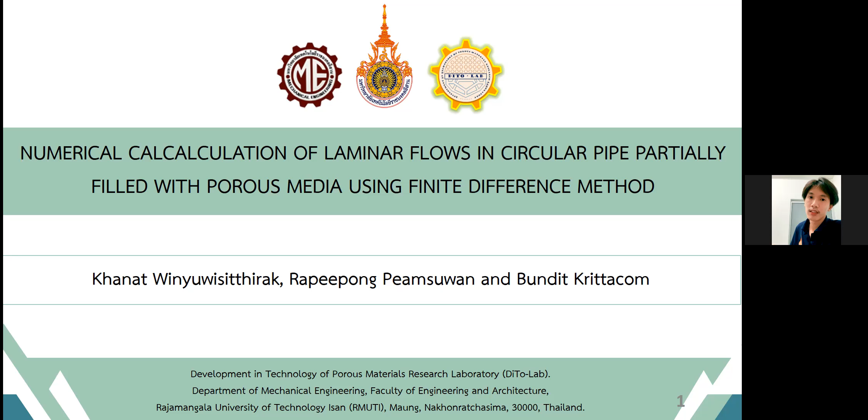Good afternoon, ladies and gentlemen. My name is Khanat Winyuwisitthirak. First of all, thank you all for coming here today. Today I'd like to present about numerical calculation of laminar flow in circular pipe partially filled with porous media using the finite difference method. This is the research of Khanat Winyuwisitthirak, Rapeepong Peamsuwan, and Bundit Krittacom.

My presentation will be in 5 parts. In the first part, introduction, the flow of fluids can be divided into 2 types. The Couette flow is the movement of the top plate, while the plate below it will not move. The Poiseuille flow is a flow in which the 2 flat plates remain stationary.

Filter, heat exchanger, catalytic converter, and pneumatic devices are examples of Poiseuille flow through porous media in industrial applications.

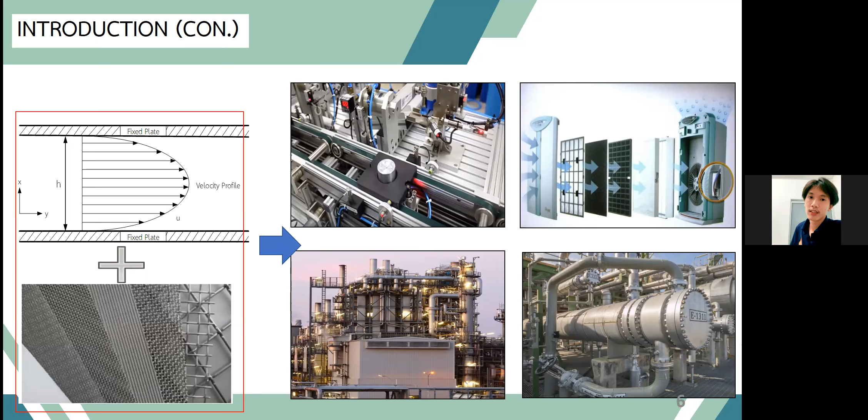Adetayo Samuel Eegunjobi studied inherent irreversibility in unsteady generalized Couette flow between parallel plates with variable viscosity, using the finite difference method.

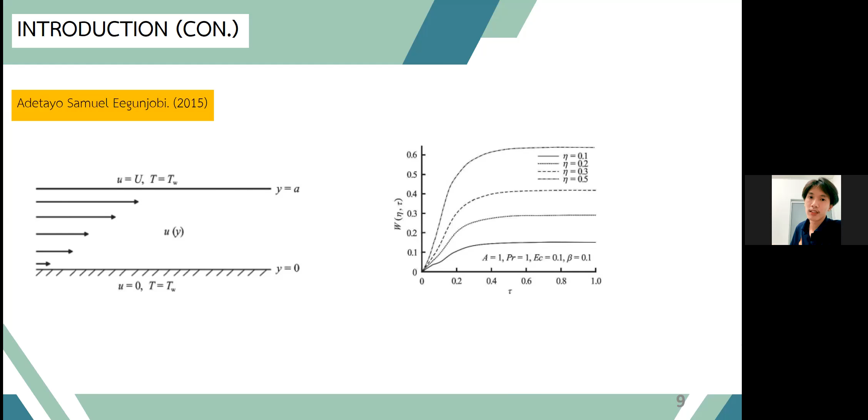Iffat Zehra et al. studied pressure-dependent viscosity subject to Poiseuille and Couette flow via a tangent hyperbolic model, using the finite difference method.

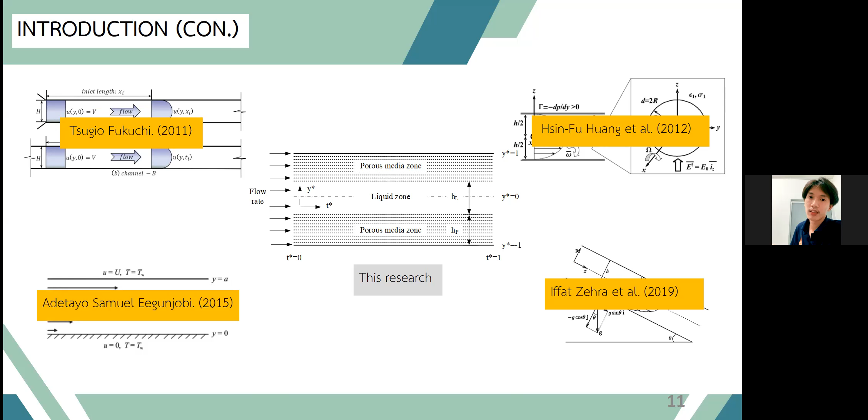As a result, we present a numerical simulation of laminar flow in a circular pipe partially filled with porous material using the finite difference method. We examine the velocity and temperature profile inside the pipe and within the pipe wall. Let's go to the next point.

Mathematical model. The physical model of fluid via porous media and porous media dependency is shown schematically in the figure.

Equations 1 and 2 are the governing equations for the Navier and energy equation in the fluid zone. Equations 3 and 4 are the governing equations for the Navier and energy equation in the porous media zone. The boundary conditions in the fluid zone are equations 5a and 5b. Equations 6a and 6b define the boundary conditions in the porous media zone.

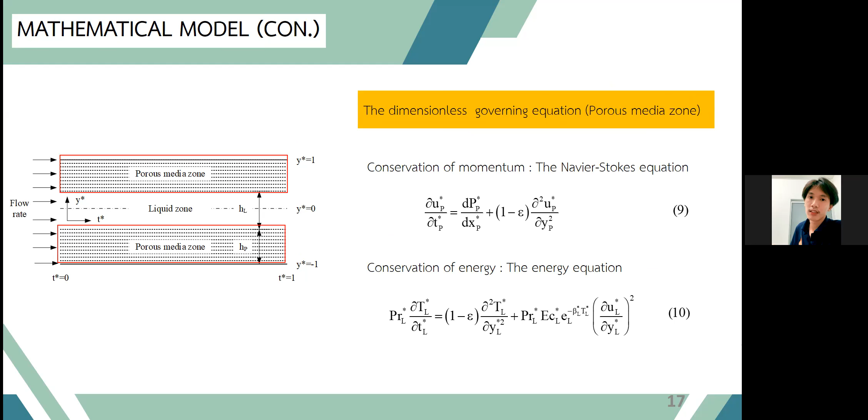All of these are dimensionless equations, which are defined in the mathematical model. Equations 7 and 8 are the dimensionless governing equations for the Navier and energy equation in the fluid zone. The dimensionless governing equations for the Navier and energy equation in the porous media zone are equations 9 and 10. The dimensionless boundary conditions in the fluid and porous media zones are equations 11a, 11b, 12a, and 12b.

Let's go to the next point. Finite difference method. The dimensionless governing equations were substituted with finite difference approximations, following the Navier-Stokes and energy equations. We use the explicit finite difference method to solve the problem.

This is the finite difference form of the Navier-Stokes equation, equation 13, and the energy equation, equation 14, in the fluid zone. Let us define the time interval of the finite difference for the Navier-Stokes and energy equations for the fluid zone as equations 15 and 16.

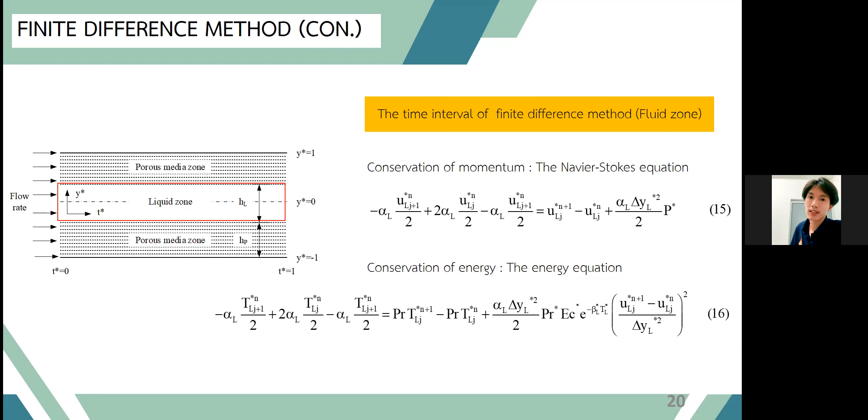This is the finite difference form of the Navier-Stokes equation, equation 17, and the energy equation, equation 18, for the porous media zone. Let us define the time interval of the Navier-Stokes and energy equations for the porous media zone as equations 19 and 20.

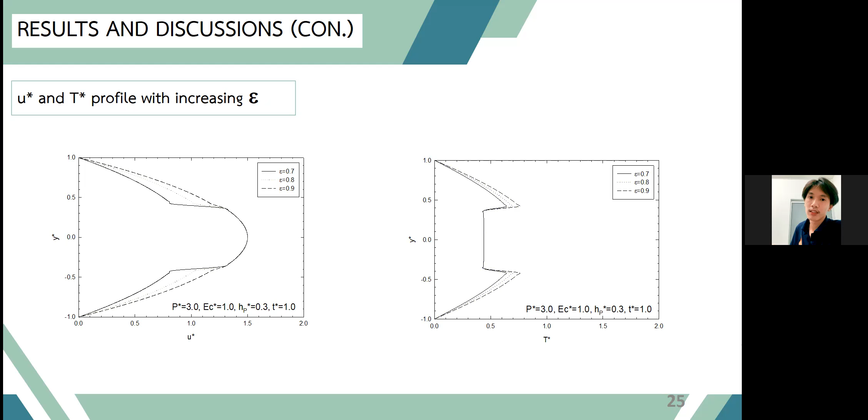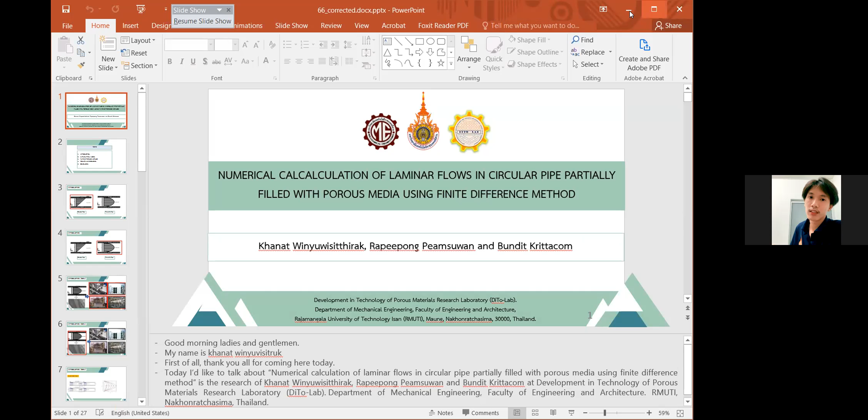By this time, Dr. Bevin. Yep, hello Dr. Bevin. Yes. In my place the network also sometimes has problems, so if something happens, please continue for the next presenter after finishing the previous one. No worries, I need your help. No worries, okay, thank you.

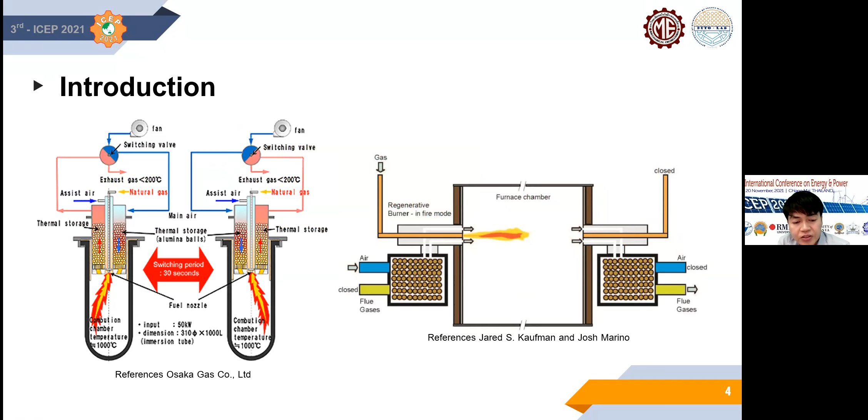The advantages of combustion in a porous material are stability of the flame, high radiation output, and reduction of NOx and CO. The porous burner is readily applied for many purposes, including heating such as heat exchangers, power generation, gas stoves, and power sources.

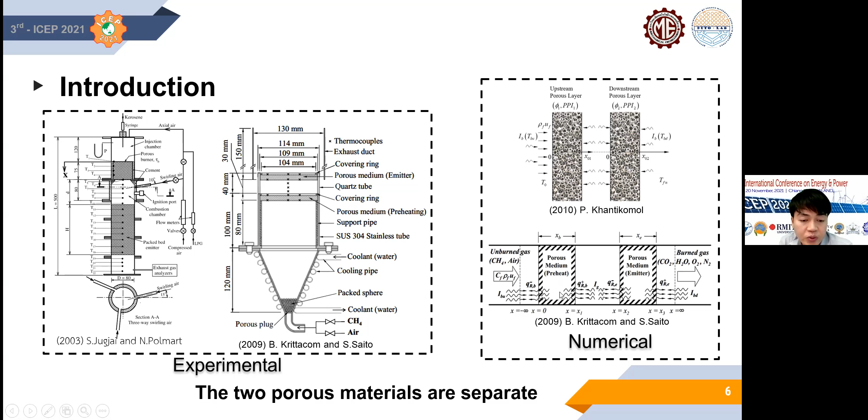The two porous materials used to separate the higher thermal radiance output are the porous absorber (PA) and the porous emitter (PE), which are major criteria that have encouraged many engineers and researchers to conduct numerical and experimental studies.

In the year 2018, we conducted an experimental study on the installation of a two-bank heat exchanger on a gas porous burner, to study the performance of the combustion mechanism and thermal efficiency.

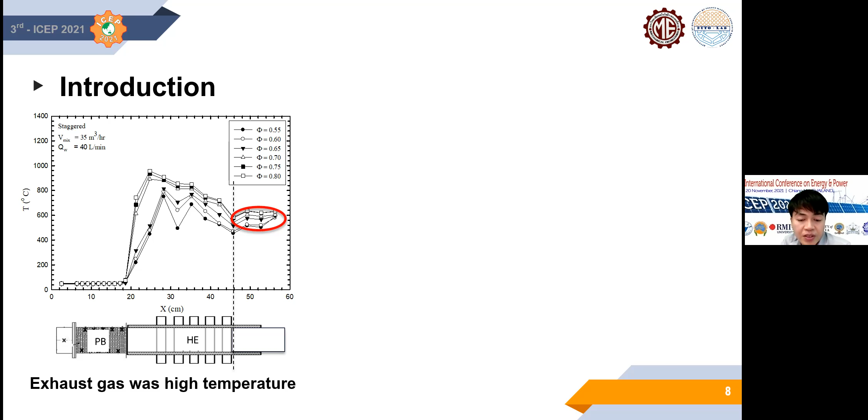The PE is installed at the exit zone of the porous burner. It was found that T increases, improving the combustion performance.

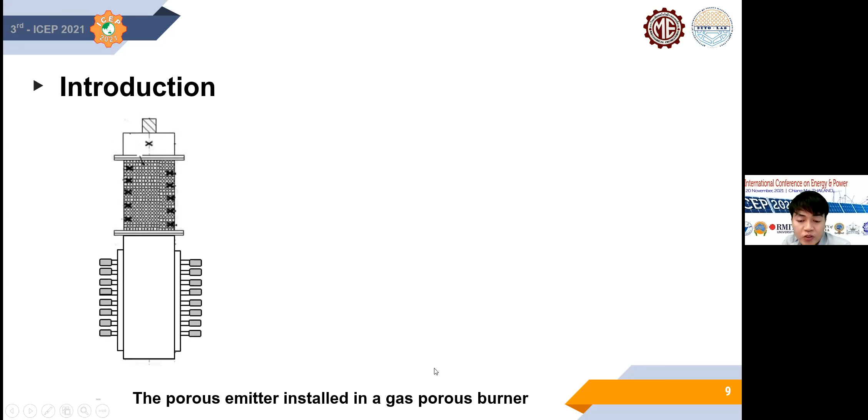From the experience with the PE of the gas porous burner, the PE was extended as the exit zone of exhaust gas below the two-bank heat exchanger, with the objective of improving the thermal effectiveness of the two-bank heat exchanger and the thermal efficiency of the gas porous burner.

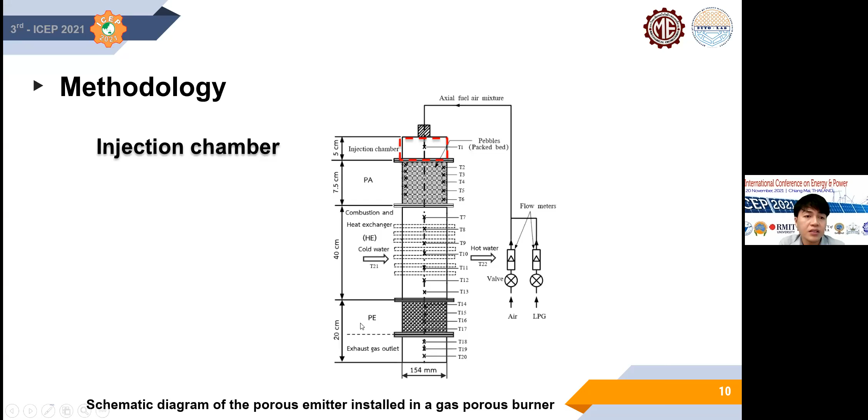Hello, Sri Punya. Probably his network is not working. His connection seems to have dropped, he is disconnected. Okay, just wait a few minutes, one minute, let's see. Okay, no problem.

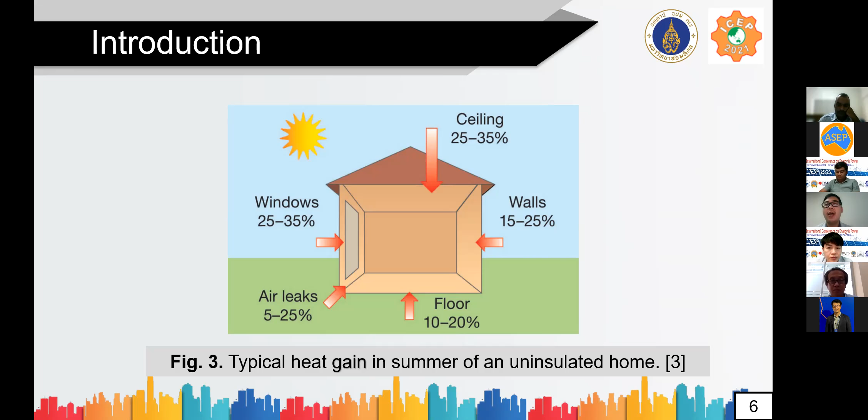Next, methodology. First, preparation of samples. Roof paint samples of various colors were obtained from two well-known commercial brands in Thailand, Brand A and Brand B. It comprises 3 colors: white, black, and red.

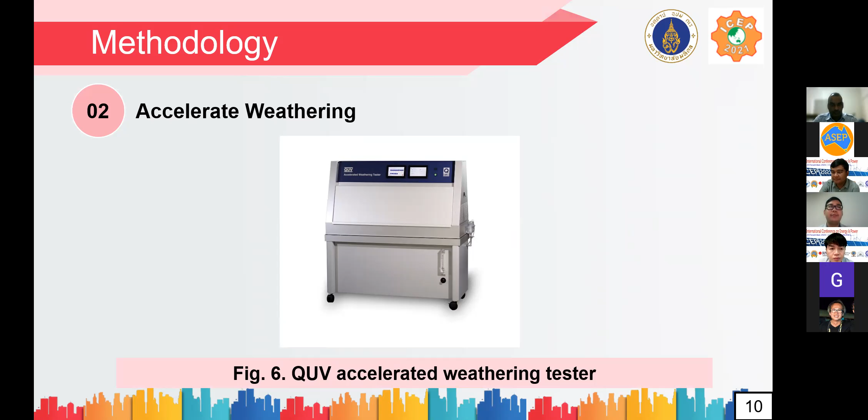Next is the UV measurement. A UV-NIR spectrophotometer was used to measure solar reflectance with wavelength ranging from 300 to 2500 nanometers, and thermal emission was measured by Fourier transform infrared spectroscopy (FTIR). These values were used to calculate the solar reflectance index (SRI), and finally to calculate roof thermal transfer value following the equation.

This is indicative of lesser heat absorption. Considering the black and red color shades for both brands, they can only reflect heat within the infrared spectrum, with a lower percentage than white color.

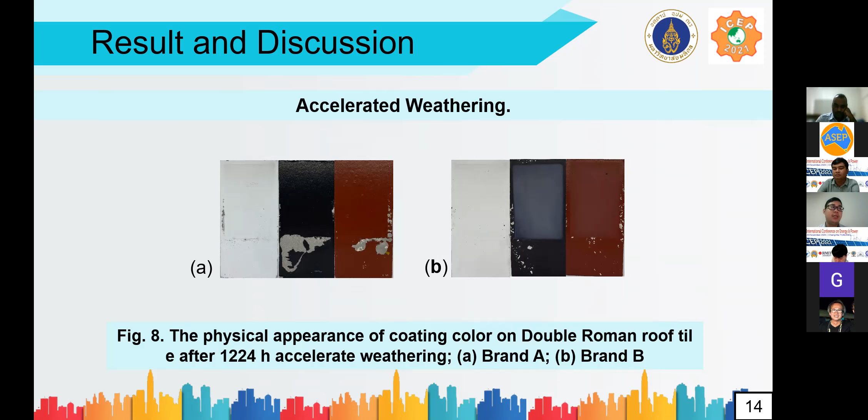The red color showed SRI differences of no more than 0.85% and 3.57% for Brand A and Brand B respectively. So the red color was not significantly different.

Next, we calculated the roof thermal transfer value. The heat that passes inside the building is studied by determining the roof thermal transfer value, or RTTV. The results in figure 10 show the relationship between roof thermal transfer value and equivalent natural aging. For the white color coating roof in figure 10A, we found an increase of roof thermal transfer value.

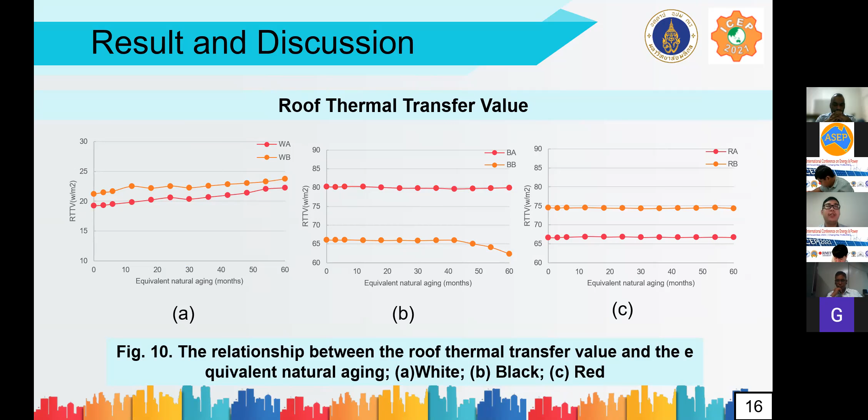Finally, conclusion. This study on accelerated weathering experiment used 3 colors consisting of white, black, and red, and brands A and B. White color coating had higher solar reflectance in visible and infrared wavelengths, giving the highest reflectance at initial time. After accelerated weathering by QUV accelerated weathering tester, the reflectance index was reduced. On the other hand, black and red coatings had lower solar reflectance index due to their lower reflectivity.

In summary, white coating roof was shown to have more energy saving potential in the building. This is my references.

Thank you. Do you have any question?

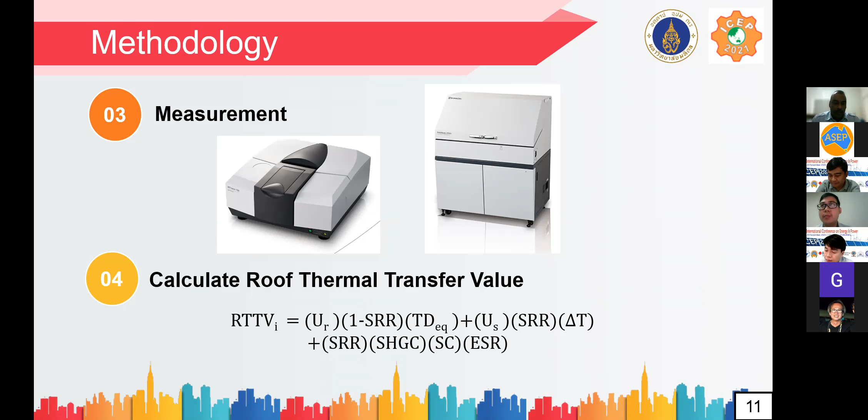I think a professor was asking you, what was your efficiency? When you spoke about efficiency, what did you compare your results to? When you say, for example, I can increase by 30%, or reduce the energy loading by 30%, do you have any figure?

How much energy can you save by using this cool roof paint? So, for example, you say I can save 30%. How did you say that? How did you compare, and with what?

It's not linearly comparing. Yes, if SRI increases, roof thermal transfer value decreases, but not linearly. It cannot be compared directly; there is no equation to calculate and compare that.

Fantastic. And why did you just choose these three colors? Because I think I saw a silver color. You showed a silver color?

Yes, yes. So why did you only choose red, black, and white? So white and black are reference colors, and red is most used in Thailand. Okay, yes.

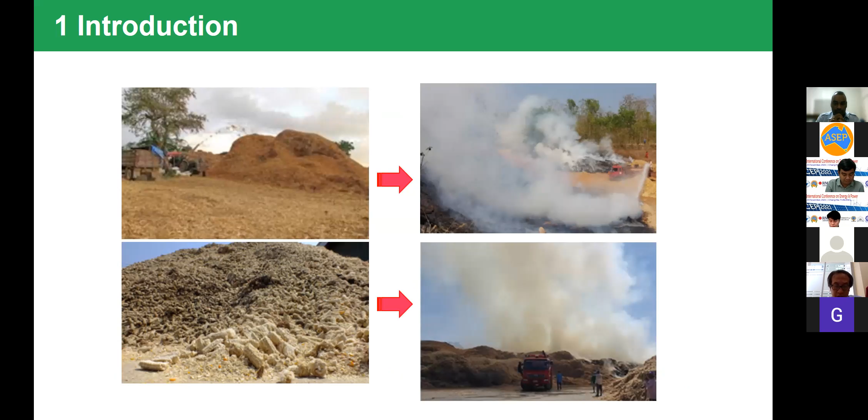In the past, farmers in Thailand burned this residue to destroy it, leading to pollution from smoke, dust, and air pollution. However, corn crop residue after pyrolysis or carbonization can be converted to biochar. It can be used to produce biogas or pellet fuel. Corn crop biochar can also be used in organic cultivation and to reduce soil acidity.

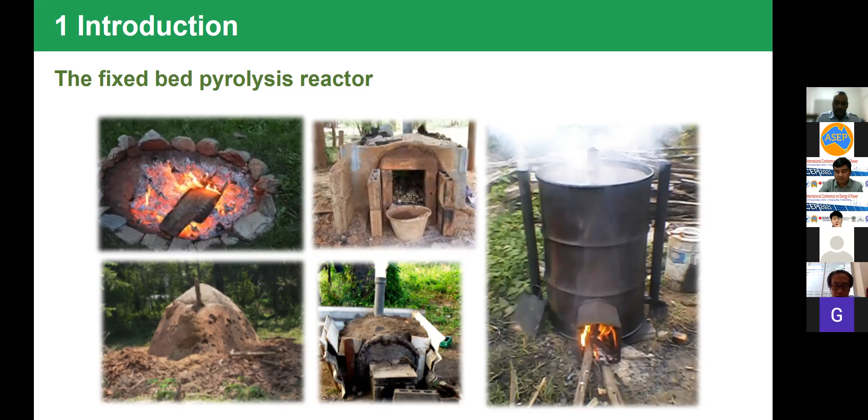Normally, biochar is produced using a fixed bed pyrolysis reactor, such as pit kiln, small kiln, big kiln, and transportable metal kiln. Usually it takes a long time to produce, with high cost. Therefore, there is an idea to create a moving bed pyrolysis reactor, which with a shorter residence time can reduce the energy input and increase the production rate.

As the design concept, the moving bed pyrolysis used a 1 horsepower electric motor to actuate the biomass.

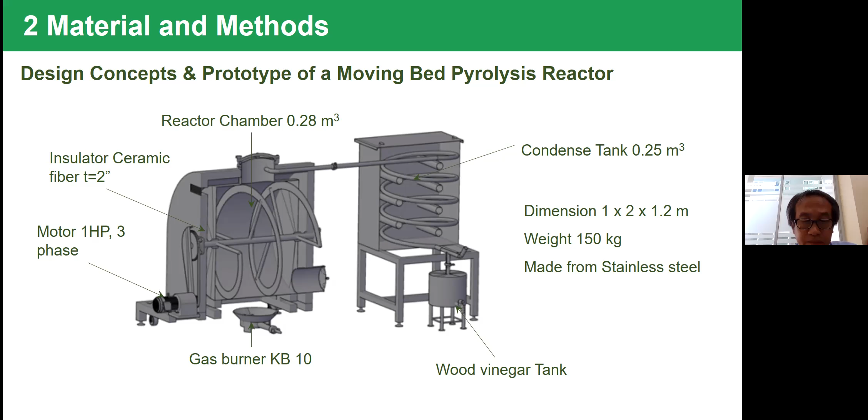Its pyrolysis chamber, 280 liters, made from stainless steel, could handle 30 kilograms of corn cobs. The heat source comes from the combustion of cooking gas. Temperature is in the range of 450 to 550 degrees Celsius. The cooling pipe is coiled into a spring made from stainless steel pipe.

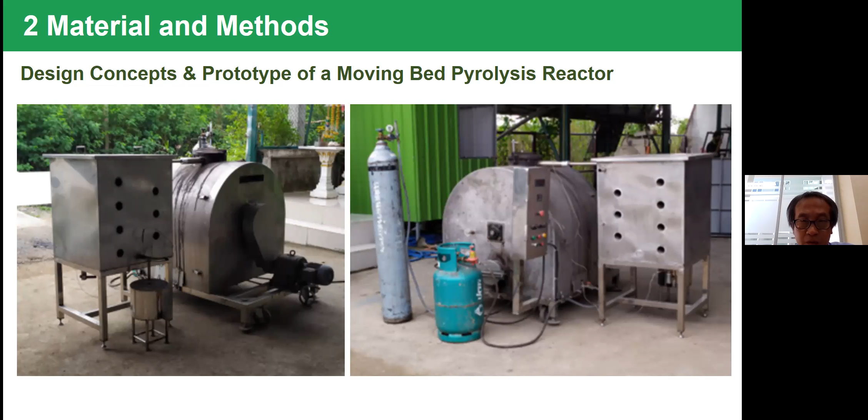The moving bed pyrolysis reactor prototype dimension is approximately 1 meter wide, 2 meters long, and 1.2 meters high.

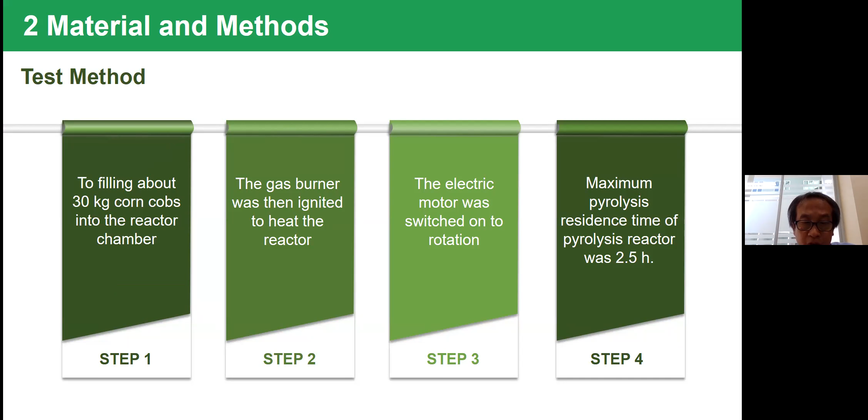Test method: first, fill about 30 kg of corncob into the reactor chamber. Second, the gas burner was ignited to heat the reactor. Third, the electric motor was switched on for rotation. Fourth, the maximum pyrolysis residence time of the pyrolysis reactor was 2.5 hours.

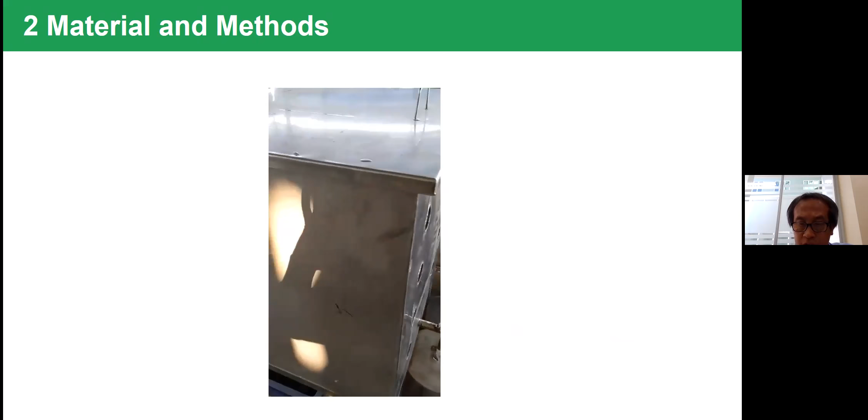The valve of the chamber was opened to release moisture and volatile matter for about 30 to 60 minutes. Once temperature reached 300 degrees Celsius, some corncob was converted to biochar. The temperature continued to rise.

Up to 560 degrees. The weight of biochar, cooking gas, charcoal, and wood vinegar before and after the experiment were monitored, while the pyrolysis temperature and residence time were recorded throughout the process.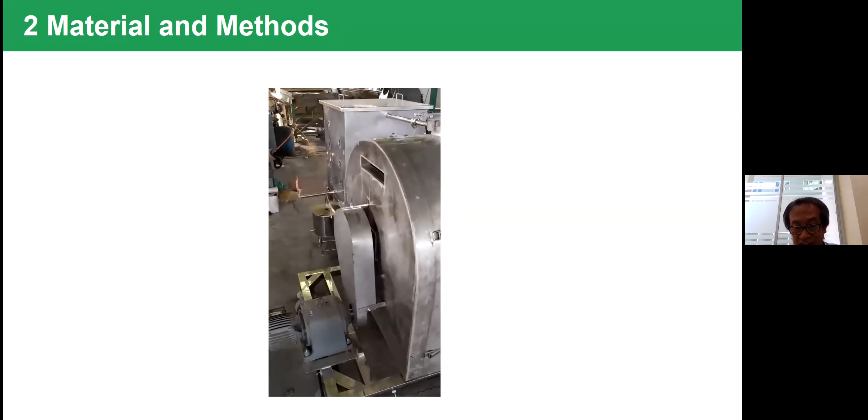The test of the moving bed pyrolysis reactor, carrying 30 kg of corncob, showed satisfactory results, generating pyrolysis temperature up to 600 degrees Celsius. The electric motor worked well. The process of corncob was carried out in 2.5 hours, yielding about 9.5 kg of biochar.

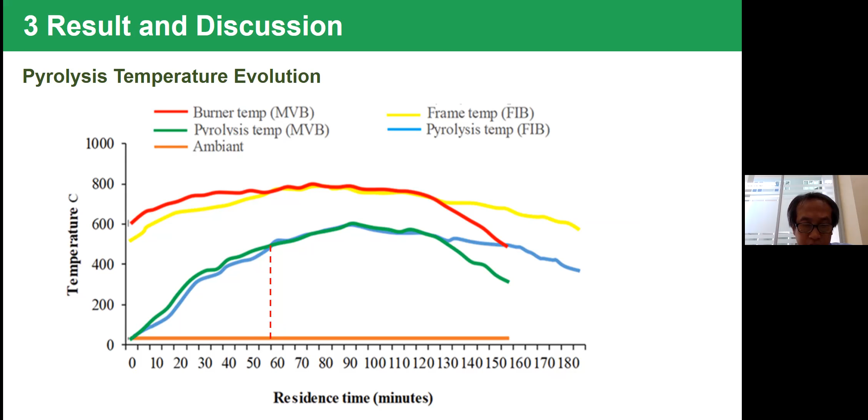The temperature was compared to a fixed bed pyrolysis reactor from observation. At the start of the process, the moving bed pyrolysis reactor could produce higher pyrolysis temperature than the fixed bed pyrolysis reactor. However, after 60 minutes, the pyrolysis temperatures were similar.

From the test, carbonization was found to work well, providing high yield of biochar in 2.5 hours, and achieving pyrolysis temperature up to 600 degrees Celsius.

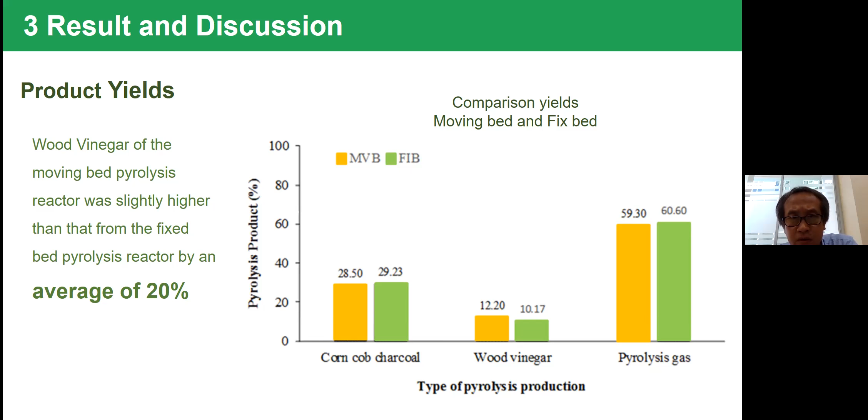The pyrolysis gas, the product, from your slide you have a pyrolysis gas. So you use it for heating.

Again, please. Oh, I'm looking at your chart here. So you have your products: corn cob, charcoal, wood vinegar, and your pyrolysis gas. So the yellow one is moving bed and the green one is fixed bed. Okay, so it's similar, only the wood vinegar is higher.

No worries, thank you. Thank you for your presentation. Any other questions? Thank you. Professor, any questions?

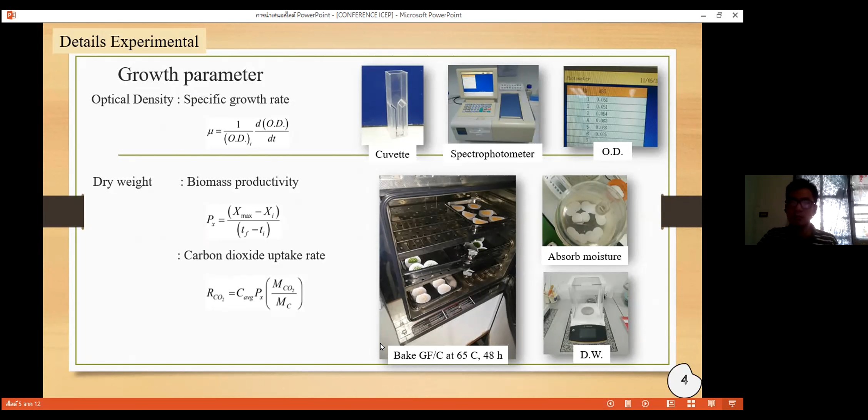This novel-built tubular coil photobioreactor was designed for lab scale and consists of a tubular coil and a vertical bubble column. The tubular coil reactor has an extensive length that increases the residence time between carbon dioxide and algae, so that more carbon dioxide can be dissolved.

Moreover, the tubular reactor has a small diameter, so the algae is thoroughly subject to illumination. The bubble column is assembled to the tubular coil reactor to increase the gas transfer rate.

The microalgae culture is pumped from a buffer tank to the top of the tubular coil by a magnetic pump, where it flows by gravity to the coil bottom, then returns to the surface of the buffer tank for the dissolved gas from photosynthesis production, passing through a cooling jacket and magnetic pump respectively. The tubular photobioreactor is made up of 4 subsystems: the light supply, the buffer tank, the liquid circulation, and the temperature control.

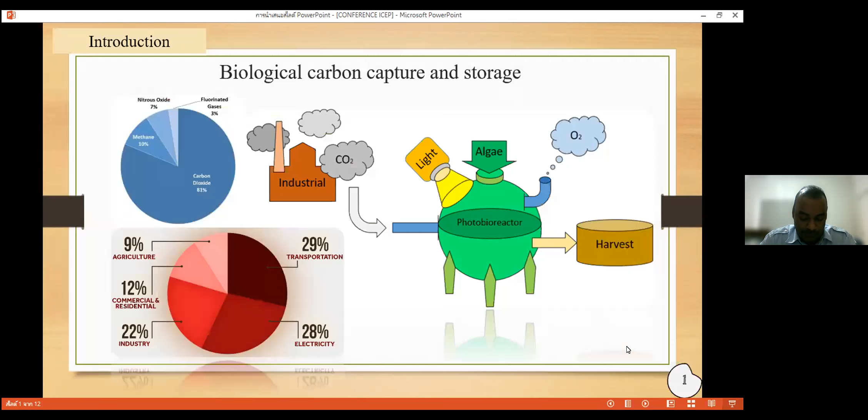So I have one question here. You chose this specific strain. Why did you choose Coelastrella? Did you consider any different algae strains, or why did you choose this strain? Coelastrella? Okay, Coelastrella. Coelastrella sp., sorry.

It is categorized as a thermophilic species that can withstand high temperatures. In this model, there is heat from the pump, and Coelastrella can withstand high temperature.

Okay, so high temperature. What is the average temperature in Thailand? I'm setting up the photobioreactor in an indoor lab scale. Ambient temperature is about 30 to 32 Celsius.

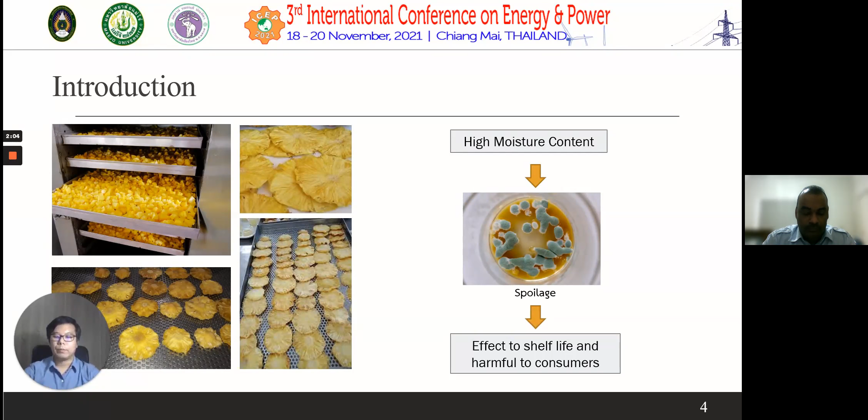Ultrasonic vibration technology can be used to induce water movement in the product, resulting in a faster dehydration rate. The advantages of ultrasonic are low power consumption and low heat build-up at the vibration transducer. In addition, using low temperature can preserve nutrients in the product. It is of great interest to apply this technique to the pineapple drying process.

From the problems above, the objective of this research is to reduce the drying time by using ultrasonic vibration technology.

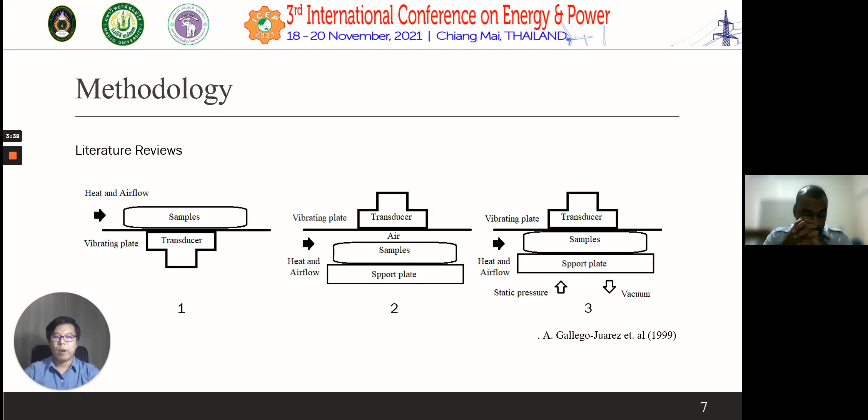Methodology: from literature review, ultrasonic setting in drying is shown in 3 methods. The first feature is suitable for setting up ultrasonic vibration in a hot air dryer. Features 2 and 3 are suitable for a vacuum dryer or microwave dryer. For my experiment, a laboratory hot air dryer was used to simulate the conditions of a solar dryer for pineapple processing.

Fresh pineapples were selected according to their maturity and color. After cleaning and peeling, they were sliced into pieces about 10 mm thick using a slicing machine. A transducer with a frequency of 40 kHz and 50 watts was set up and installed at the center of a wire mesh sized 40 by 40 centimeters. Operating temperature was fixed at 60 degrees Celsius, based on the temperature in the solar dryer.

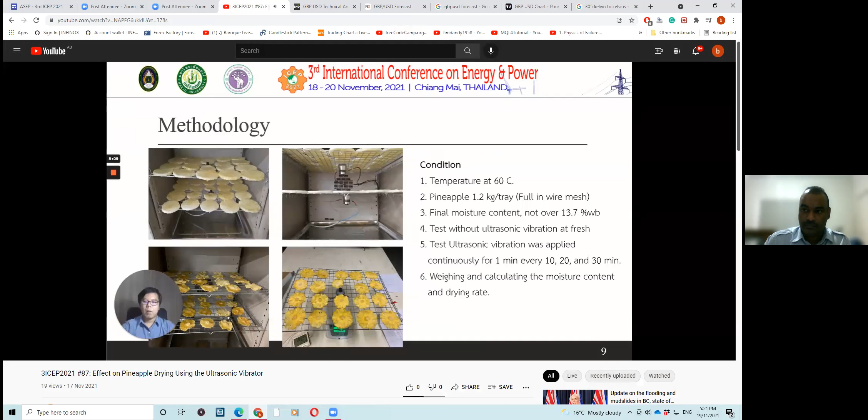The condition of the experiment: temperature fixed at 60 degrees Celsius, volume of pineapple about 1.2 kg per tray, final moisture content not over 13.7% wet basis. Tests were done without ultrasonic vibration and with ultrasonic vibration applied continuously for 1 minute every 10, 20, and 30 minutes, measuring and calculating the moisture content and drying rate.

Results from the experiment: this picture shows the relationship between the drying and the time the vibration transducer was on. The moisture content of pineapple is reduced following application of ultrasonic pulses for 1 minute every 10, 20, and 30 minutes, compared with no ultrasonic vibration system. The fastest drying time was achieved with vibration applied every 10 minutes.

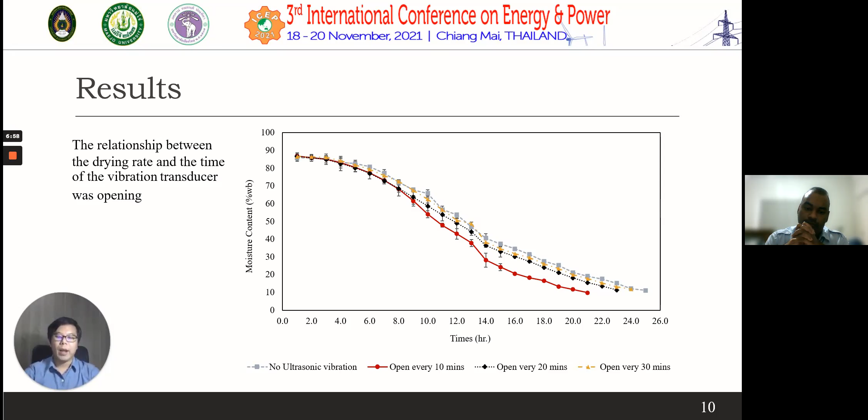The highest drying rate is achieved by applying vibration every 10 minutes, getting a drying rate of 48.57 grams per hour.

Conclusion: ultrasonic vibration is effective for drying rate. It was caused by accelerated movement of water in the pineapple, causing it to evaporate more quickly compared to normal hot air drying.

Using a vibration system helps reduce the drying time. The reduction in drying time and moisture content was tested in a hot air dryer with temperature controlled at 60 degrees Celsius, applying vibration every 10 minutes.

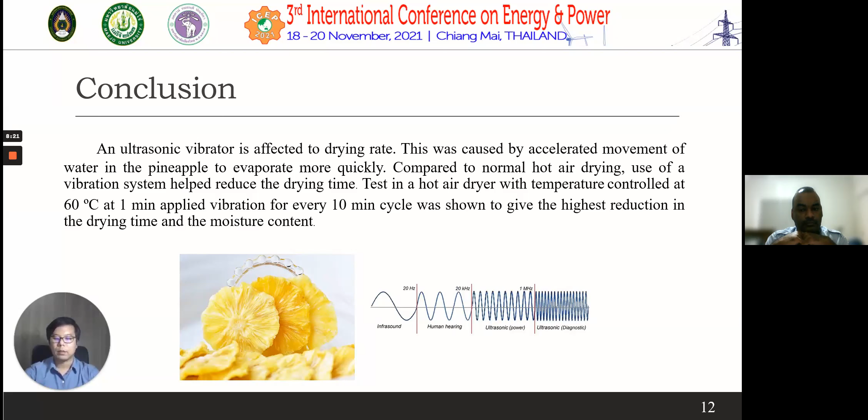However, future work might include analysis of the texture and taste characteristics of the dry product, consumer demand, analysis of energy consumption in the production process, and evaluation of the economic feasibility.

Acknowledgement: this work was supported by the Faculty of Industrial Technology, Uttaradit Rajabhat University, the School of Renewable Energy, Maejo University, and Chiang Mai University. Thank you to the technical and laboratory assistant staff at the Energy Management Engineering program. Thank you for your attention.

Great, thank you very much. And as you know, we are here assembled on the traditional territory of the Lekwungen-speaking people, Esquimalt and Songhees.

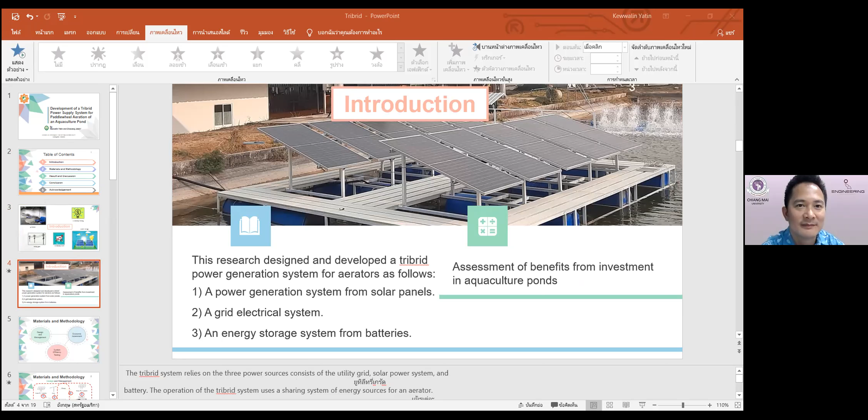Okay, let's present, skip to others first. The session chair has some technical problem with her computer, so she would like to ask the next presenter to go ahead, and she will return when it's ready. Is that okay?

Okay, sure. Okay, yeah Dr. Bavin, you just call next on, 93 ID number. Yep, ID number 93.

Hello, number 93. Development of manufacturing gypsum board from coconut and water hyacinth fibers. Mr. Philip, Philin Hankunton. Yes, please. Thank you.

Are you ready? I'm ready. Thank you.

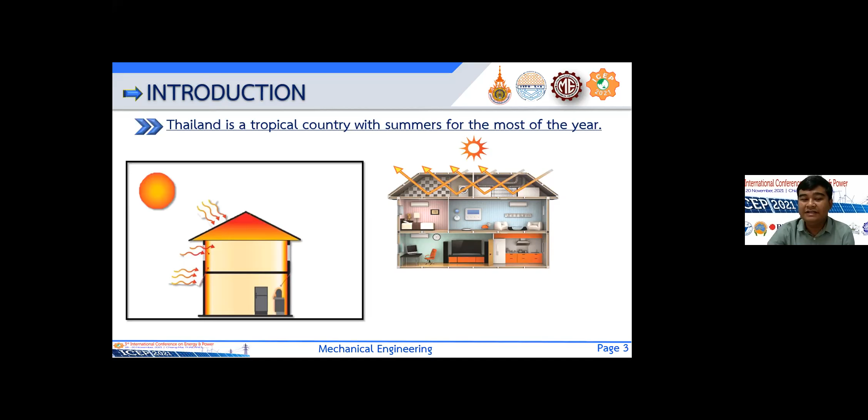Introduction: Thailand is a tropical country with summer-like weather most of the year. As a result, residents of buildings experience accumulated heat. This heat is conducted into the structural roof, ceiling, and wall. To reduce this, insulation of ceiling and wall panels is important in the construction industry. One such item is the gypsum board, which helps reduce thermal transfer. The gypsum board is composed of plaster powder covered with sticky paper on both sides. However, installing a conventional ceiling or wall panel could not provide the desired level of heat transmission reduction. Thus, additional insulation panels have been developed.

The middle panel of the gypsum board has generally been improved through further development, such as glass wool sheets with aluminum foil, polyurethane insulation sheets, moisture resistant paper, and mixed synthetic fibers. However, these insulator sheets are very expensive and polluting.

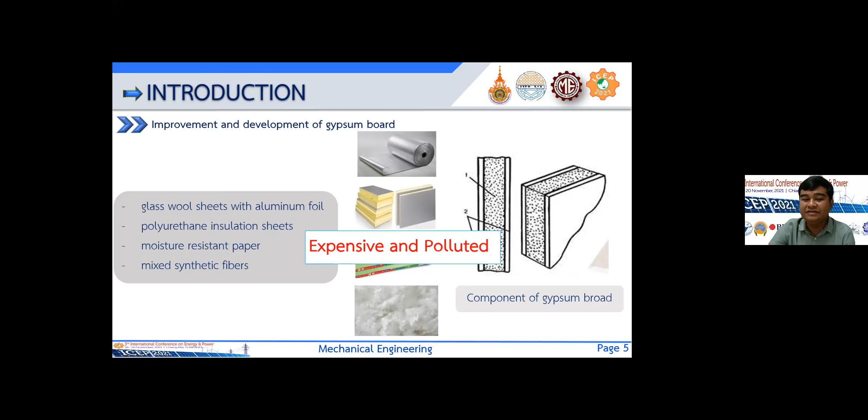Therefore, there has been research and development of ceiling and wall panels containing a mixture of natural fiber material. This is because natural fibers are strong, non-toxic, and made from agricultural waste products. The mixture is composed of cellulose, which is ideal for use as insulation due to its lightweight, ease of availability, and soluble nature. From research, there have been researchers who mix natural fiber into gypsum board.

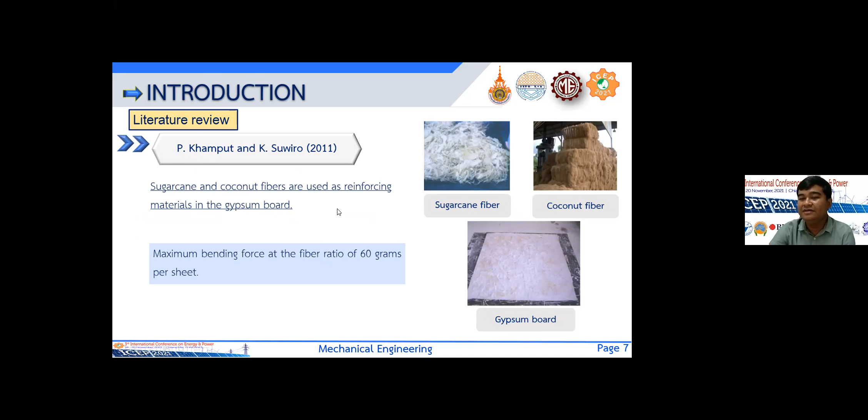In the literature review, researchers Khamput and Suwiro use bagasse, sugarcane, and coconut fiber as reinforced material in gypsum boards. Vidanupul used coconut ceiling board products with thermal insulation properties. Vatanakul and Santik Chito studied properties of natural fiber cement material containing coconut and oil palm fiber for residential building applications, intended to be used as roof sheets.

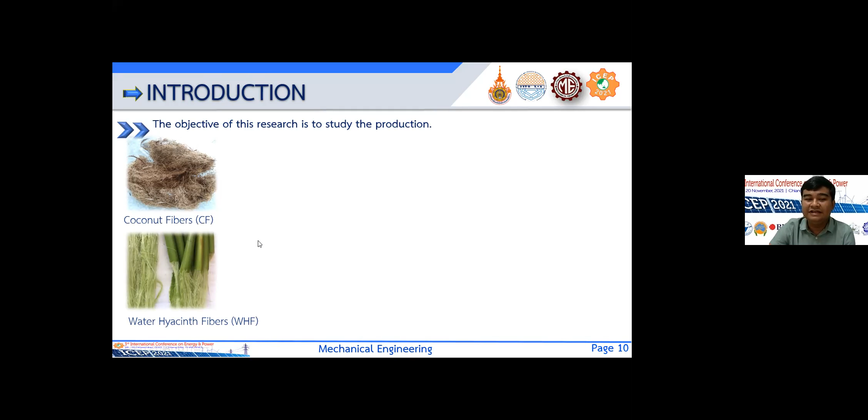The objective of this research study is the production of gypsum board. Most researchers use coconut fiber, but there is another type of fiber, water hyacinth fiber, with insulating properties. Therefore, in this research, both types of fiber will be mixed with gypsum powder to produce gypsum panels mixed with natural fiber.

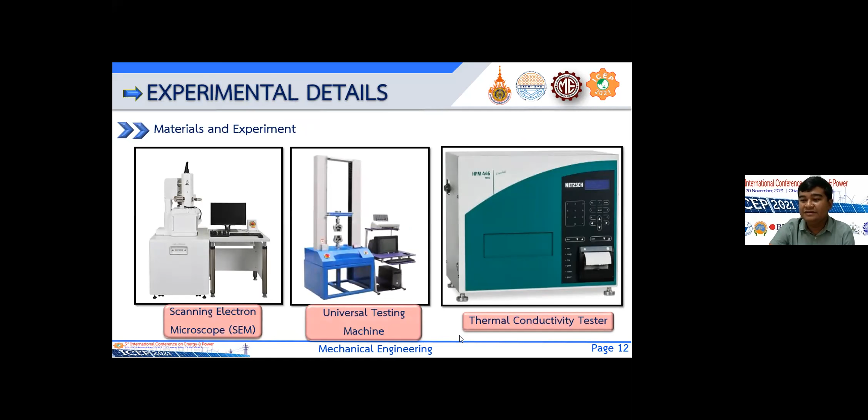Next, experimental details. Material and equipment are shown in the picture. Equipment used includes scanning electron microscopy (SEM), a universal testing machine, and a thermal conductivity tester. The mixed proportion of gypsum powder (GP) incorporating coconut fiber (CF) and water hyacinth fiber (WHF) used in the study is listed in table 1. The gypsum board was made from a combination of GP, CF, WHF, tap water, and sodium silicate.

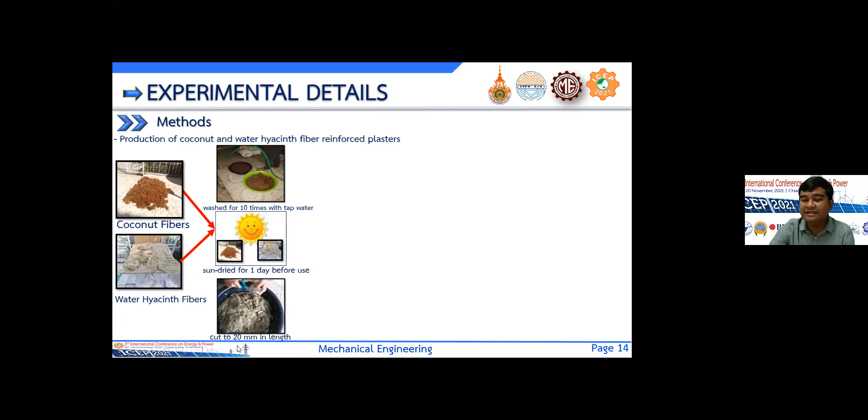Next, the method. First step: coconut fiber and water hyacinth fiber are formed from natural material, washed 10 times with tap water, and sun-dried for 1 day before use. They are then cut to 20 millimeters in length. The mass of material is weighed according to table 1, poured into the mixer, and put into the mold. In the final step, we get a gypsum board, which is cured for 28 days before testing.

Test procedures include water absorption, bending property, pull-off resistance, density, and thermal conductivity, all based on standard methods.

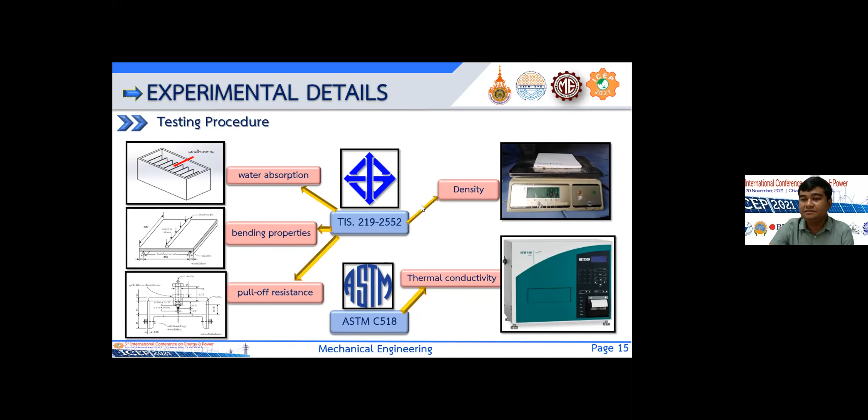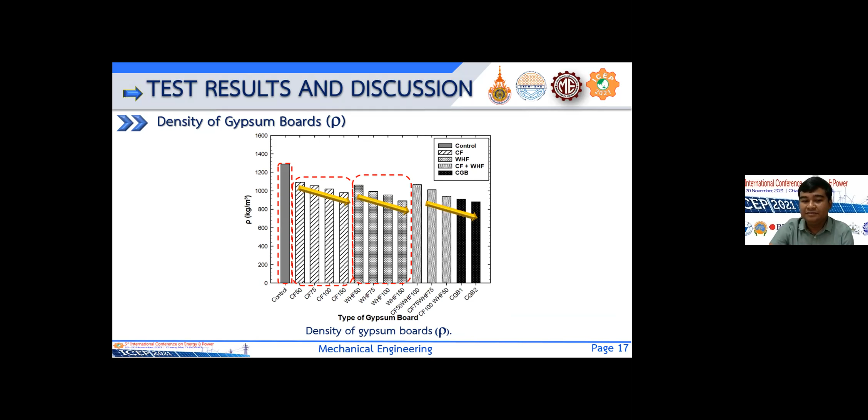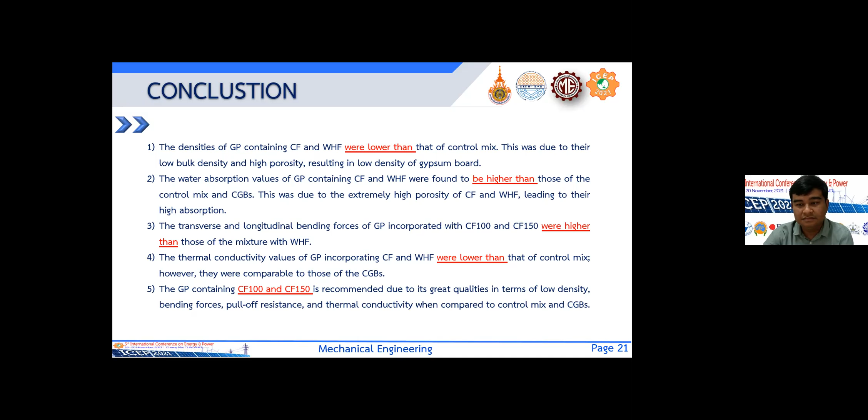Okay, sorry, I think I missed the start. Okay, no worries. No worries for me. Any more questions from the floor?

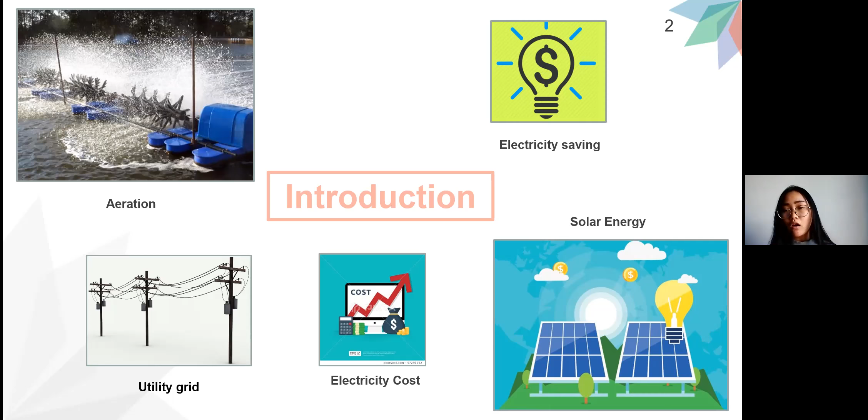The objective of this paper is to design and develop a hybrid power generation system for the aerator, and test system efficiency as follows: 1. A power generation system from solar panels. 2. A grid electrical system. And 3. An energy storage system from batteries. And the last one, assessment of benefits from investment in the aquaculture pond.

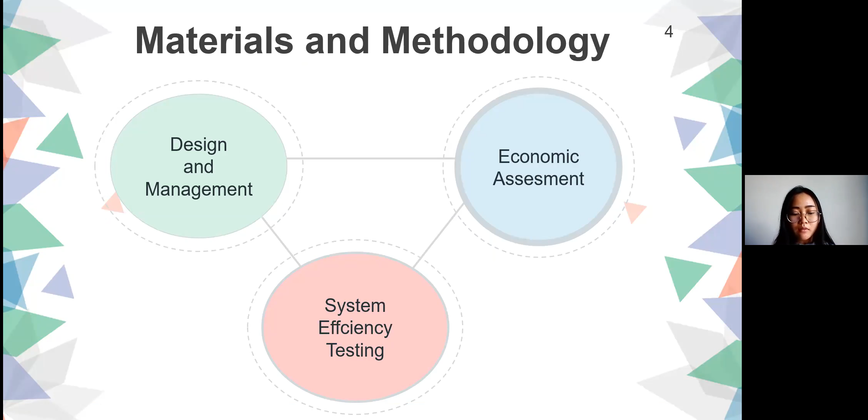Then I move on to material and methodology. First is design and management. Second is system efficiency testing. And the last one is economic assessment.

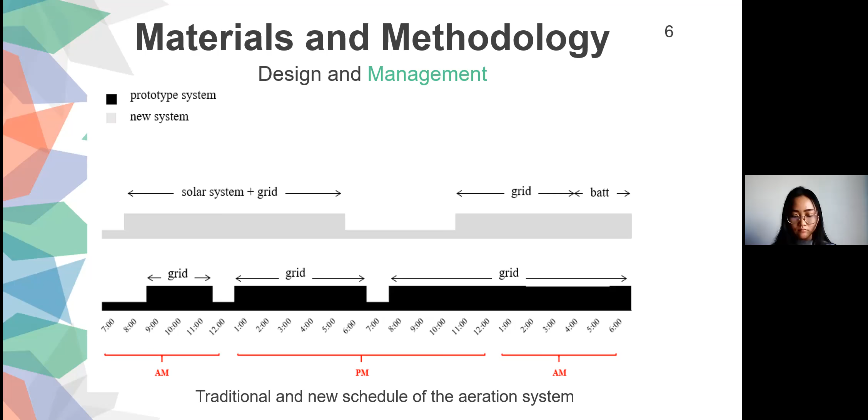System efficiency testing. System efficiency is tested to find the efficiency of both normal and crisis events. The generator is turned on during the day between 8 a.m. to 6 p.m., running on the solar power system and utility grid system.

Situation 2 runs on the utility grid system only, between 11 p.m. to 4 a.m. Situation 3 uses the battery system only, between the time of 4 a.m. to 6 a.m.

And the last section, economic assessment. Economic assessment to analyze the investment for the agriculture plant power generation system and to design the criteria for system installation, where IC is investment capital in Thai baht, and P is profit in baht per cycle.

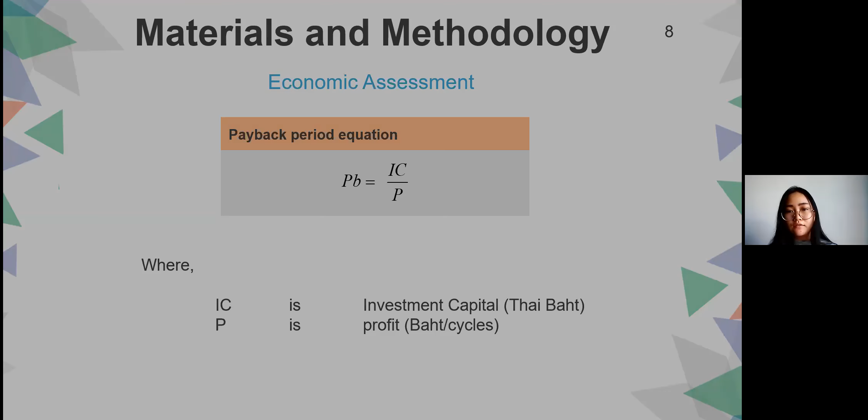Then in the result and discussion, divided into 3 parts: 1. Design result of the driving power system, 2. Testing system result, and 3. Economic analysis result.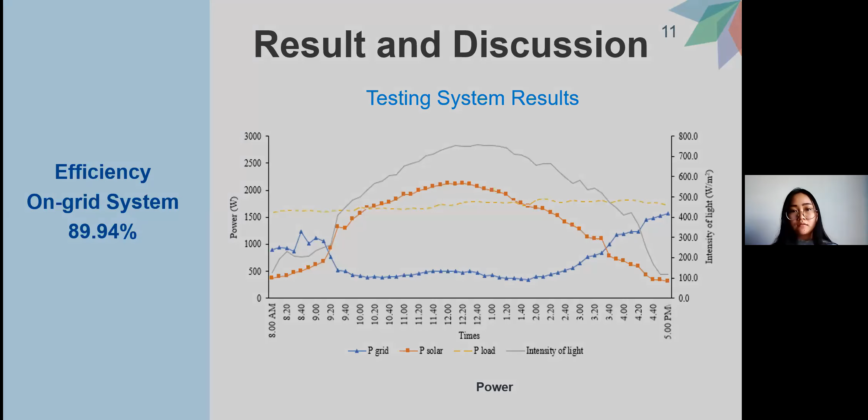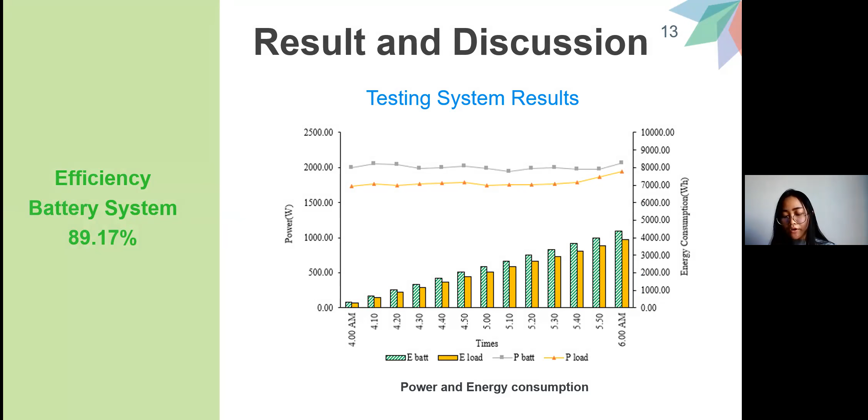This graph shows the battery system. In this case, the power and energy shown indicate the electrical power from the battery, and the aerator usage has a proportional relationship. The efficiency of this system is 89.17%.

In the last section of the results: investment capital and electrical power saving and payback period. Investment in the device system, including material and equipment, has a total value of 147,000 Thai baht. The operating system is for one production cycle, and theoretical power saving is 6,390, with a payback period of approximately 22 cycles.

Finally, conclusion: the device system is well designed, consisting of 3 electrical energy sources, including the solar panel, utility grid, and 2 battery modules. The efficiency of the system is 89.94% for the on-grid, 90.61% for the utility grid, and 89.17% for the battery.

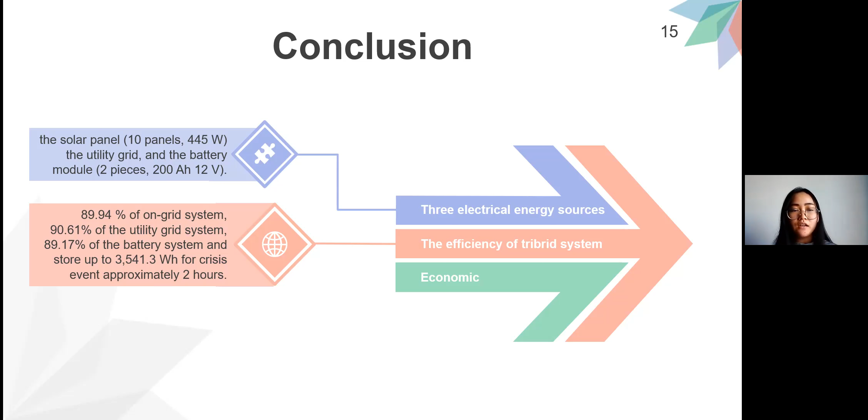The solar store can provide up to 3,541.3 watt-hours for a crisis event, approximately 2 hours. Finally, the investment budget is 147,000 Thai baht with a payback period of 23 production cycles.

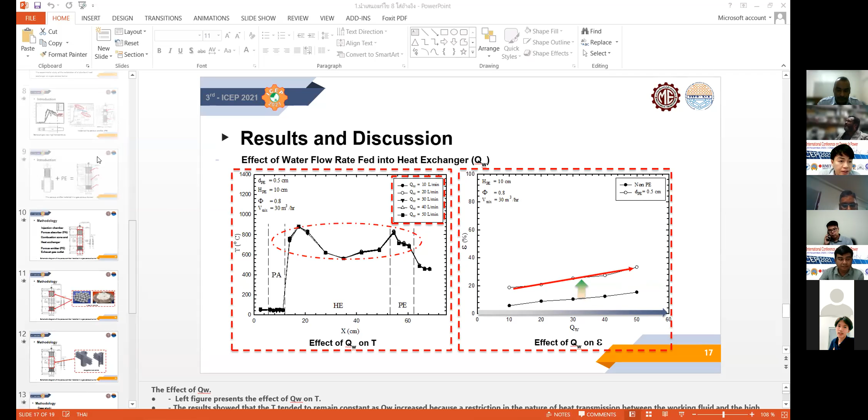Sri Punya, are you ready? Yeah. Okay. Can you see my slide? Yeah. I'll slide to the methodology.

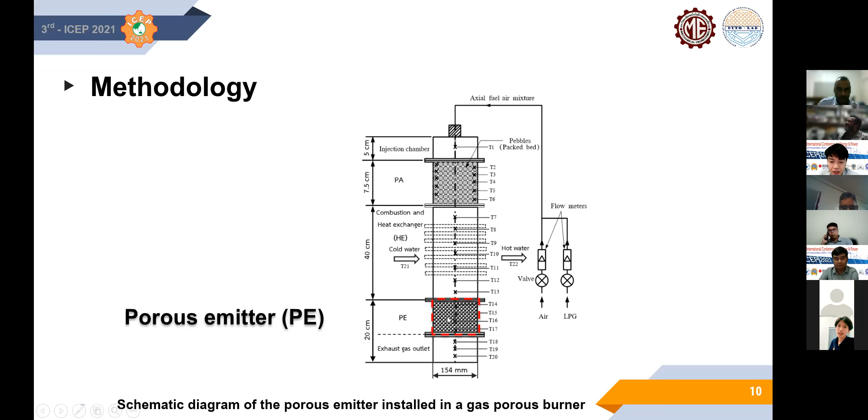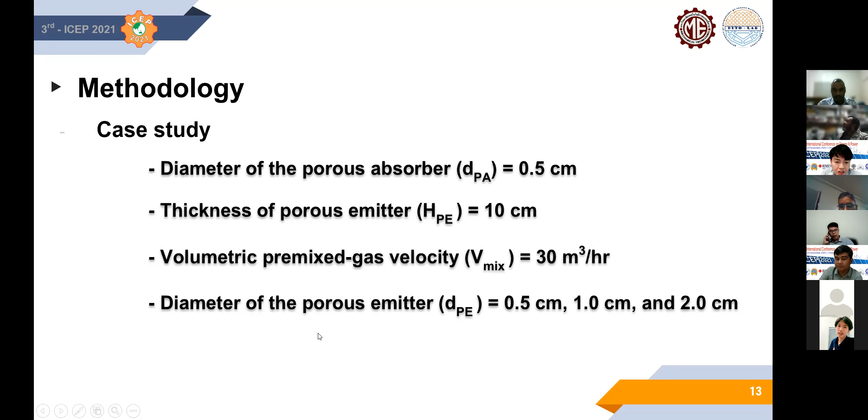The methodology: the first injection chamber, porous absorber PA, combustion zone, HE, PE installers, exhaust gas outlets. The PE and PA are made with aluminium oxide as porous matrix. The SUS 300 flow stainless tube is the tube bank heat exchanger. Case study variables: diameter of the porous absorber DPA, thickness of the porous emitter HPE, volumetric premixed-gas velocity Vmix, diameter of the porous emitter DPE, equivalent ratio phi, water flow feed into heat exchanger QW.

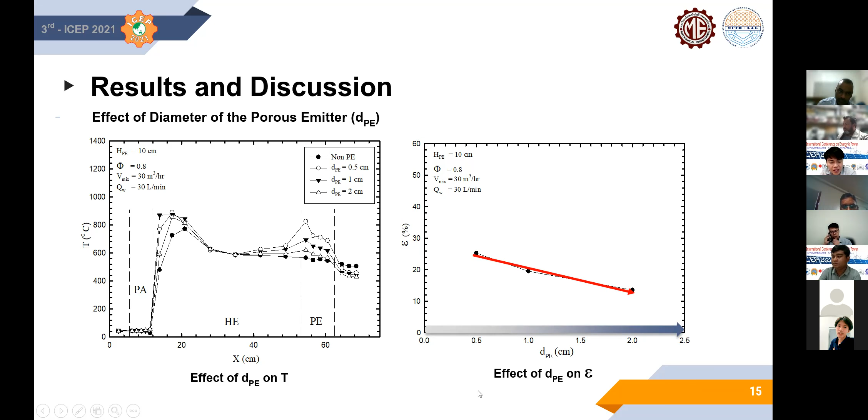The result shows that T decreases as DPE increases, because the low porosity of PE increases energy absorption. The right picture shows the effect of DPE on epsilon. The result shows epsilon decreases as DPE increases, because the decrease in flame temperature brings slight energy absorption between the working fluid of the heat exchanger and the flame temperature.

The second result indicates the effect of phi on T. The result shows that T increases as phi increases, because complete combustion may occur when the mixture of air and LPG is produced.

The right picture shows the effect of phi on epsilon. It was found that epsilon slightly increases as phi increases, because of the slight absorption between the working fluid of the heat exchanger and the high flame temperature.

Final result: the effect of QW on T. The result showed that T tends to remain constant as QW increases, because of restriction in the nature of heat transmission between the working fluid and the high temperature flame.

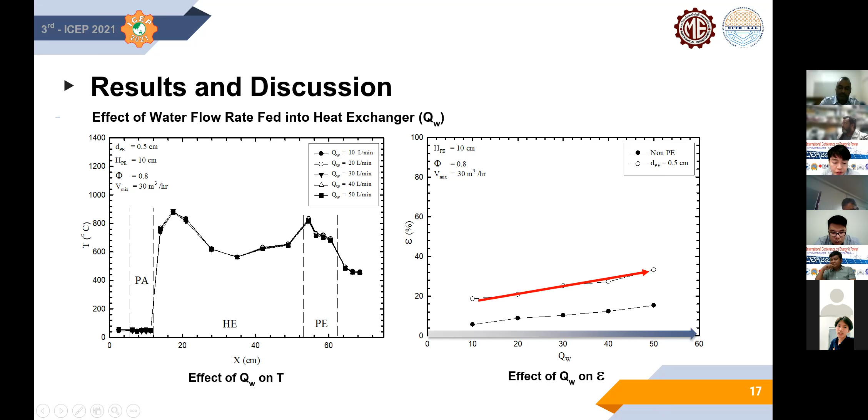Conclusion: the temperature profile increased as the equivalence ratio increased, but decreased as DPE increased. The effectiveness of the heat exchanger decreased as DPE increased, but increased as phi and QW increased. Moreover, epsilon increased with the installed PE. Thank you very much.

Thank you, Mr. Siripunia, for finishing your presentation nicely. The floor is open, any questions please? Dr. Bevin, do you have any question? I'm good. Okay, thank you Siripunia, finally he has finished his presentation nicely. Okay, if there is no question, I think from my side, thank you everyone.